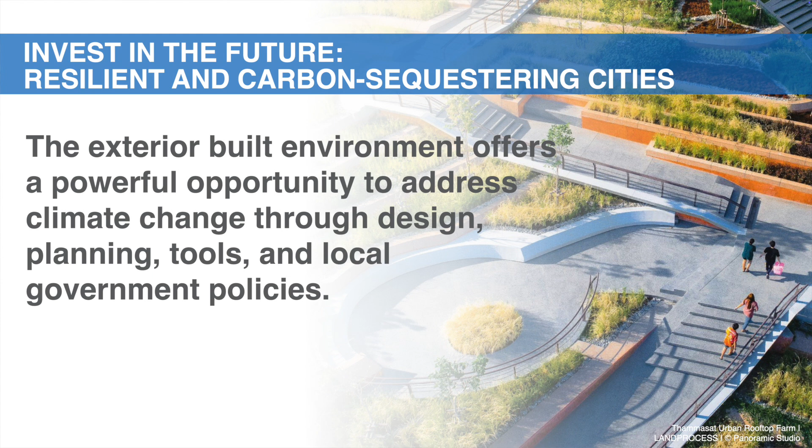So when we started our organization, the name Architecture is in there, the name 2030 is in there. As Andy mentioned, that was the date in which we wanted to see all new buildings be net zero, or we called them carbon neutral actually back then in 2006, which meant they were very efficient to operate and they were powered by renewables and had no fossil fuels on site. Well, that was a novel concept back then. Maybe we understood energy efficiency from the energy crisis in the 70s and then into the 80s. But renewable energy was just starting to take off, and we didn't even think about on-site fossil fuels that much.

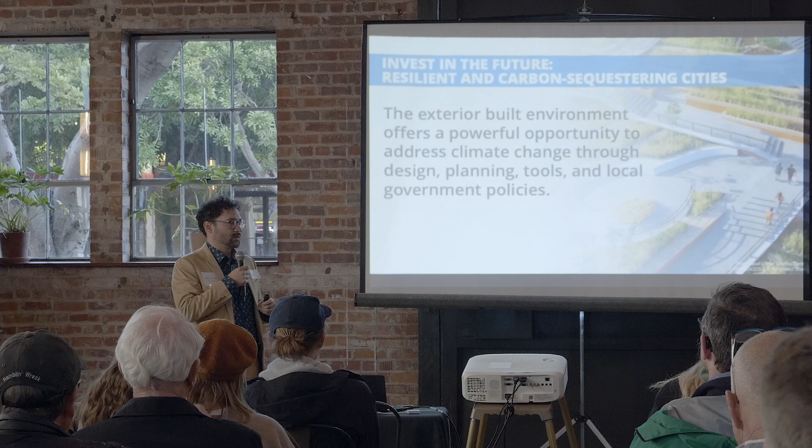However, every little building had a little power plant that was having emissions from its natural gas, and now we're talking about that. But at that time, gas was a bridge fuel for climate. We weren't talking about zero. We were talking about 80 by 50 maybe at most, 80% reduction by 2050.

But, and this was really fascinating, this is how we got started. We looked at data and we said, as we grew our built environment since the dawn of the Industrial Revolution, we increased our energy consumption, and with our energy consumption, we increased our emissions. And this was the trajectory. I could go further back if we had the data, but I'm showing 1995 to 2005 when we launched the 2030 Challenge. And this is what it looked like.

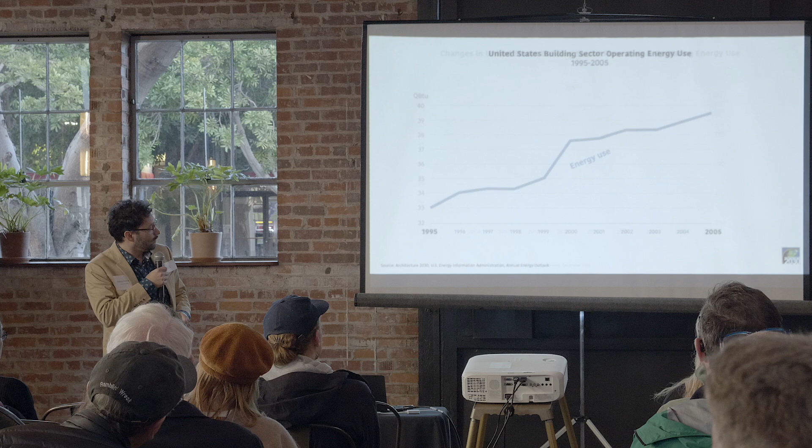Now I'm going to fast forward to 2005 to today, and this is how much building we keep adding to our building stock. We've added essentially 44 cities the size of Chicago to the US building stock. Increased our building stock by 70 billion square feet. That's a lot of buildings, right? And in a short period of time too, by the way. This is 19 years, about the same time that I started working at Architecture 2030, we built 44 Chicagos. Holy smoke. We're gonna talk a little bit about this growth pattern piece.

But look what happened. Starting in 2005, on a dime, instead of going straight through the roof, we started leveling things out and actually have reduced energy consumption in US building operations by 16%. It's because we're designing buildings to be more energy efficient. We're renovating buildings to be more energy efficient. This is both design and policy that allowed us to do this.

But how quickly did that change? How quickly? Because we woke up and we said this is a problem and we want to do something about it. And it didn't matter who was in the White House. This trajectory continued and moved forward under Republican and Democratic administrations. It didn't matter. It didn't change the flow.

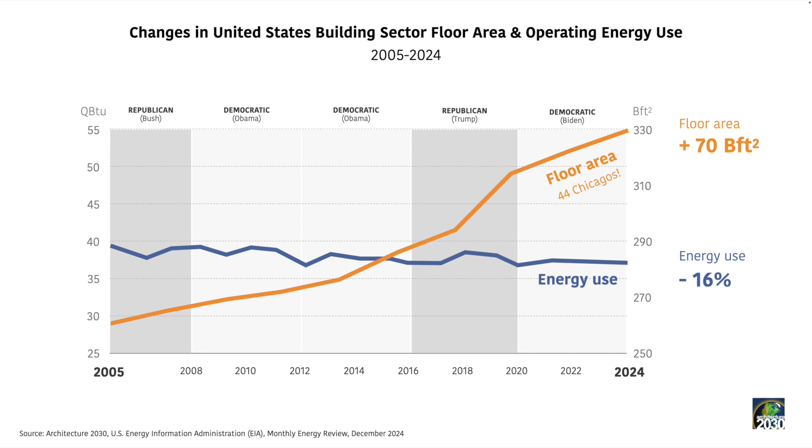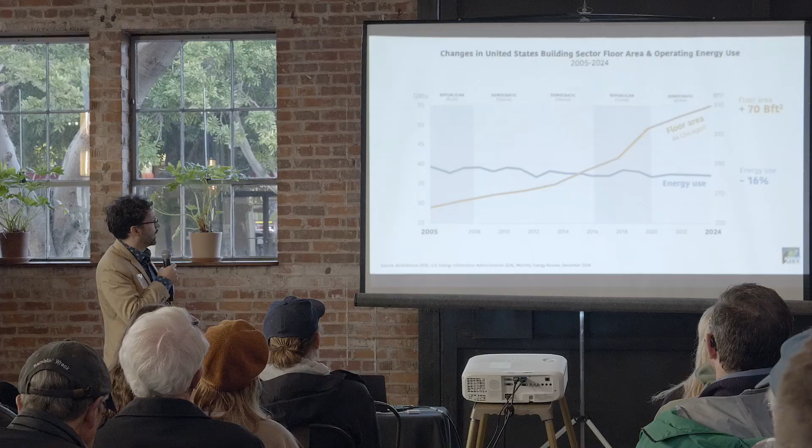And we see the movement of the modern movement as a great example of architecture, how we had the international style in the 1920s to the 1940s. We changed the face of the planet, the way the built environment was constructed, in a very short period of time. But what's even more exciting than that drop in energy consumption is the drop in emissions.

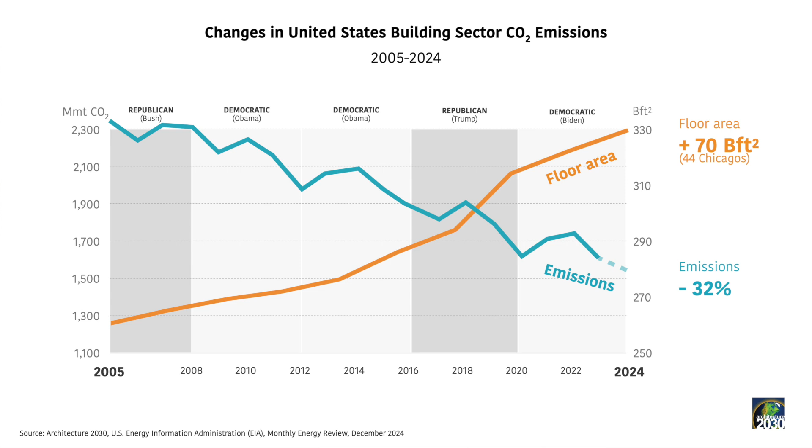32%. So when people say you get depressed, or we're not making progress - if you look at the numbers for US building sector operations, this is our heating, our lighting, our cooling, our plug loads, everything we use to keep the lights on - we've actually reduced emissions from 2005 levels by 32%, at the same time as building 44 Chicagos. That's tremendous, that's amazing, to decouple the growth of the built environment from operating emissions.

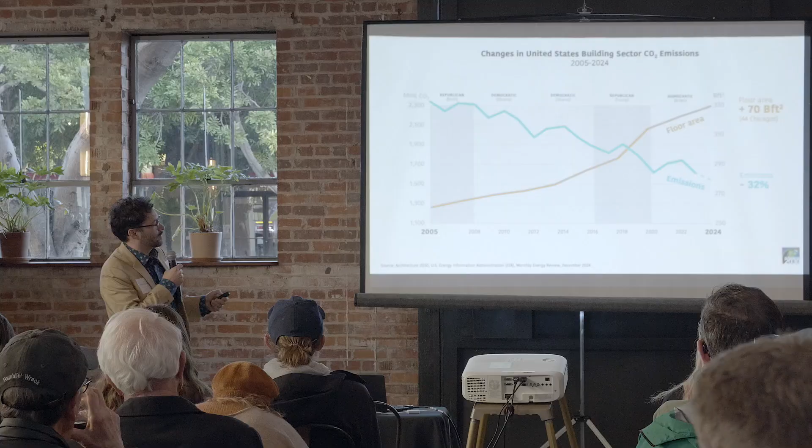But we're not talking about all the other pieces, and I'll get to those, because there's materials and there's the growth pattern and how much we're actually building. But in terms of operations, we've wanted to fix it. We're making progress. We're on track to the Paris Agreement for our sector.

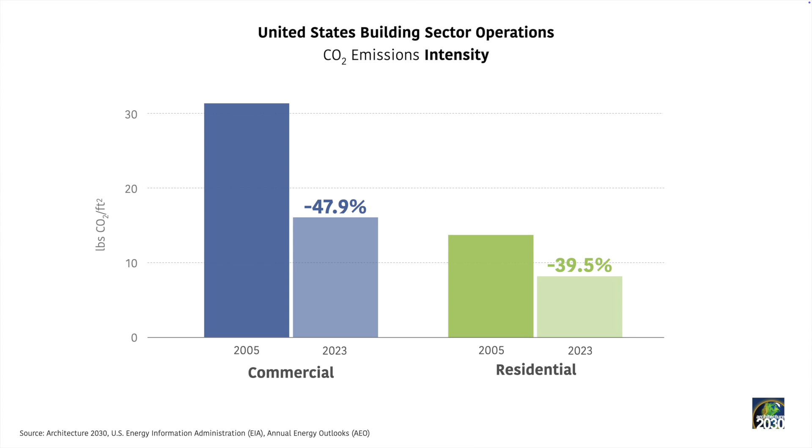And a big part of that is due to the fact, of course, that we are decarbonizing the electricity grid. This is 2010 to 2024 for the US, 32%. Mostly, look at all that coal - we've gotten rid of most of that coal, at 47%.

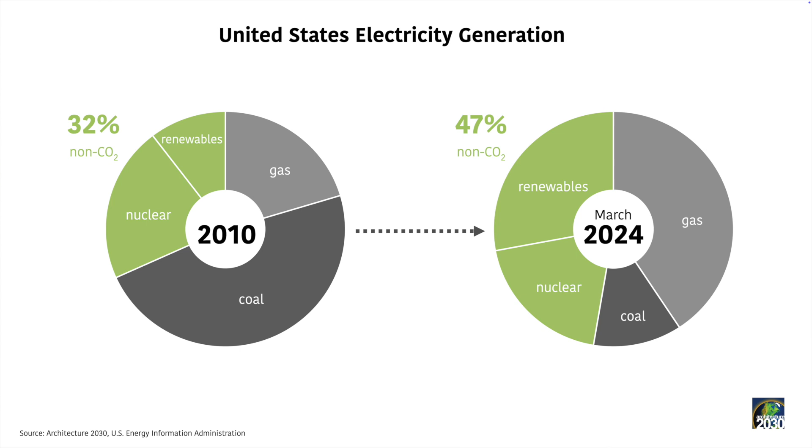But it's not just about the energy profile of the electricity grid. It's because we're doing great work in the design and construction field. And now globally, this is how it looks - 35% increase globally since 2010 in terms of our global footprint. That's the equivalent - I mentioned 44 Chicagos in the US, 2 United States globally.

Now we were the ones that coined the phrase that we build, or projected to build, the entire footprint of New York City every month for the next 40 years. It's the size of Paris every week. So plenty of work for you all if you're in the architecture and engineering fields, but a huge footprint impact.

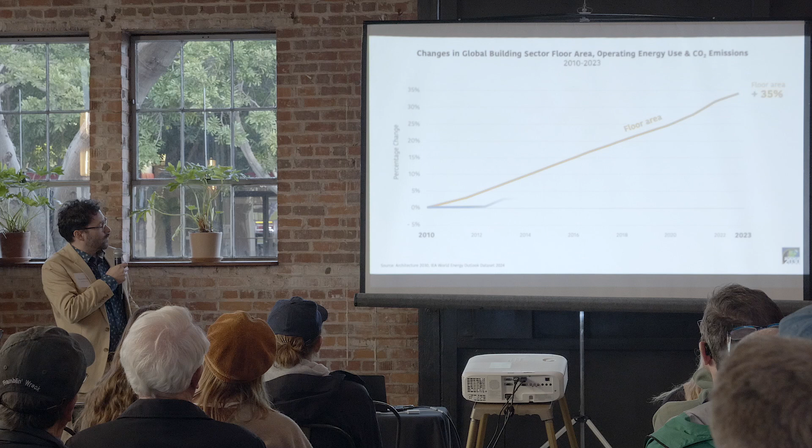And a lot of this is happening in Southeast Asia and Africa, which has an extremely young population. Latin America - we're still building in North America, and we'll still build a bit more, but it's happening in these other regions. And what's interesting to see, the globe is starting to follow a similar pattern to the US.

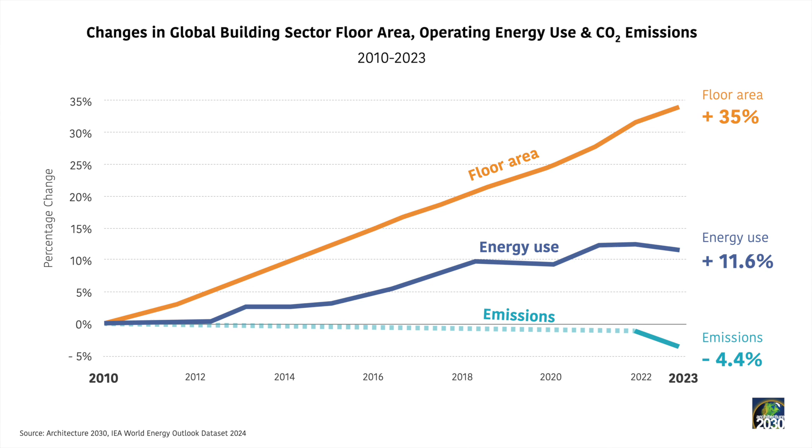And what we've done over the last 13 years is we're starting to level out energy use. We're not climbing as fast as we're climbing in our growth. We're getting more energy efficient, and this is emissions. We're actually down globally 4.4% - correct that if you're reading the recording - 4.4% of our CO2 emissions from building operations. So it's a huge success story.

We're starting to bend the curve down. We got to go faster, and we got to go there. But when we put our mind to something, we can do it. Again, a big part of this is due to the electricity grid globally.

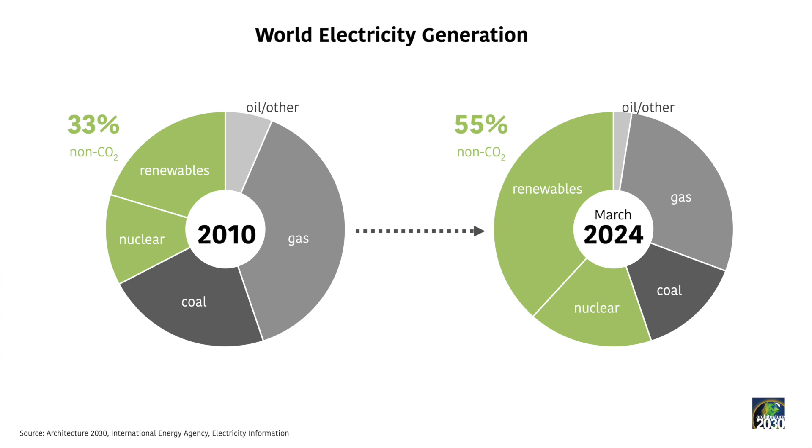Look at that - 33% non-CO2, now we're at 55%, and that's because solar and wind are just taking off like crazy. We've had more solar investments every year than all other energy sources combined for at least 5 years. We hit the transition mark a while back, that all the new generation was renewable. So we're on a good track.

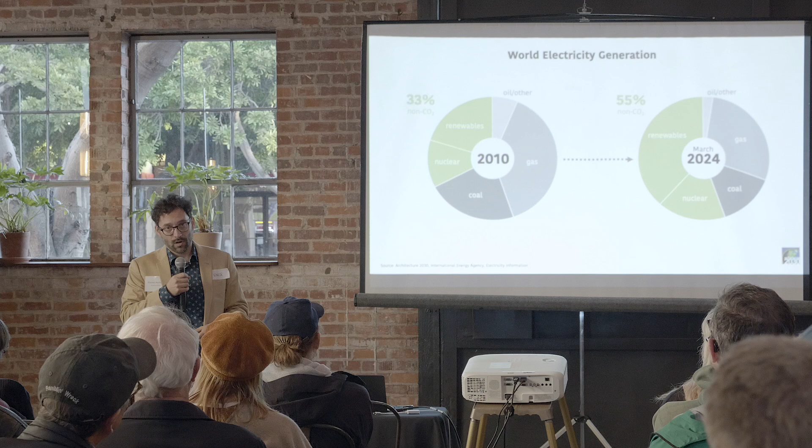So we're still responsible though for 27% in buildings of annual operating emissions, and it's made up from a variety of just subsectors. But more importantly, what I want to talk to you today about is the materials.

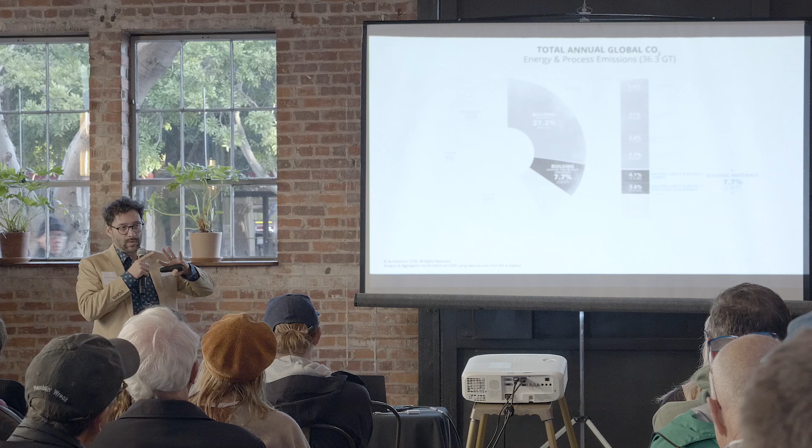So this is also called embodied carbon. It's the extraction, the manufacturing, and the construction of built projects - so we're talking about buildings here. It's about 7.7% - this is just the high intensity materials, essentially four materials: steel, aluminum, and concrete. It's three - they kind of do steel and aluminum separately.

But in addition to buildings, those high impact materials go into infrastructure. We don't really think about that a lot. I mean, a lot of the policies are devoted to buildings. We have a lot of great design going on - we have design thinking, structural optimization, low carbon concrete, mass timber designs, things like that. How are we affecting infrastructure?

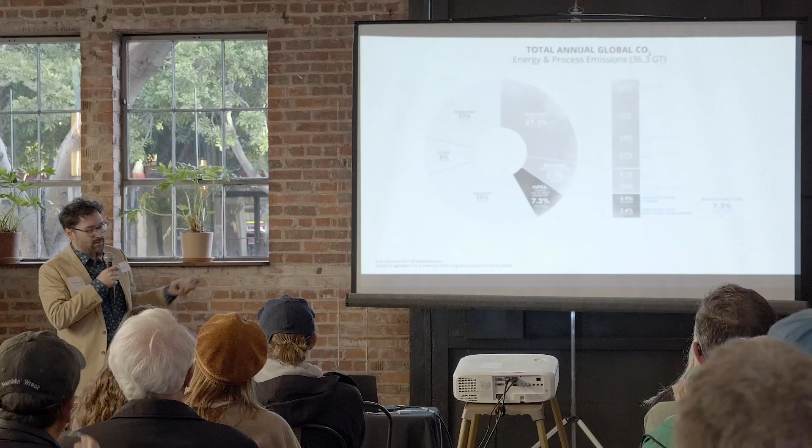And when we talk about the growth of infrastructure, which I'll get to, it's even more dramatic than in New York City every month for 40 years. So when we think about this, let's break this down a little bit.

This 15% that goes into materials, where do they go? This is, on the far left, cement. Half of the cement goes to buildings, half of the cement goes to infrastructure. That's fascinating - we think about it, it's under our feet right now. We're in a building, but it's under our feet outside too.

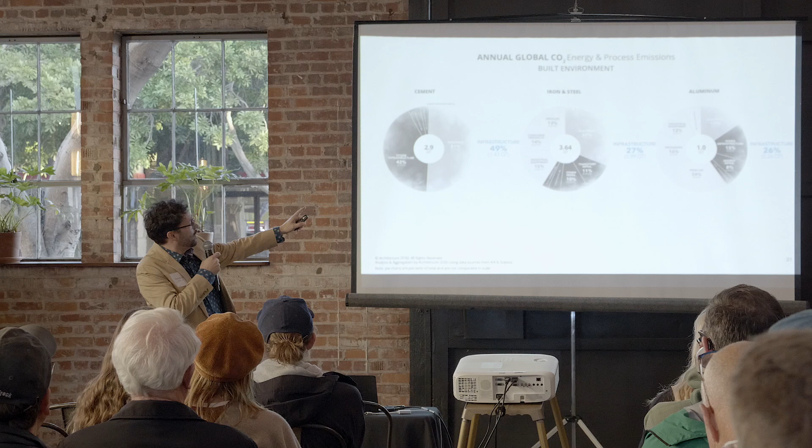Iron and steel - it's about a quarter going to each one. And then aluminum, about the same - we actually use more aluminum in our infrastructure. I won't go into the whole tariff piece conversations about these, but it's affecting our infrastructure significantly.

And that's just the high impact materials that we know about, that we have data because they're so large, so all consuming that we can actually understand what they are. We know asphalt, for example, is a huge infrastructure material, and we have zero data for it. We have very little information about how much asphalt we use, what its energy consumption is, what its emission profiles are across the globe. We just don't have that aggregated data.

So we know a good portion of this other industry, this other 22%, is industrial products that go into our infrastructure. Could be piping and roadways, all sorts of things.

This is the staggering statistic. I told you it's the equivalent of New York City every month for 40 years in terms of buildings. But the UN Secretary General says that the infrastructure needs of our population of the globe in the year 2050, 75% has yet to be built.

I think about that as we're going to do four times the infrastructure that we have right now. And where is this happening? Well, it's mostly happening in developing countries, where they don't have the infrastructure that they need to support the growing populations. Some of it, of course, will happen here still, and a lot of this will be torn down or rebuilt. There's a variety of different ways, but four times in a short period of time, it's just mind-boggling.

So we know that even if we get a handle on operating emissions, which I think we will, we're going to burn up our carbon budget like that, with all of this material that goes into our infrastructure and our buildings. So how do we get a handle on this?

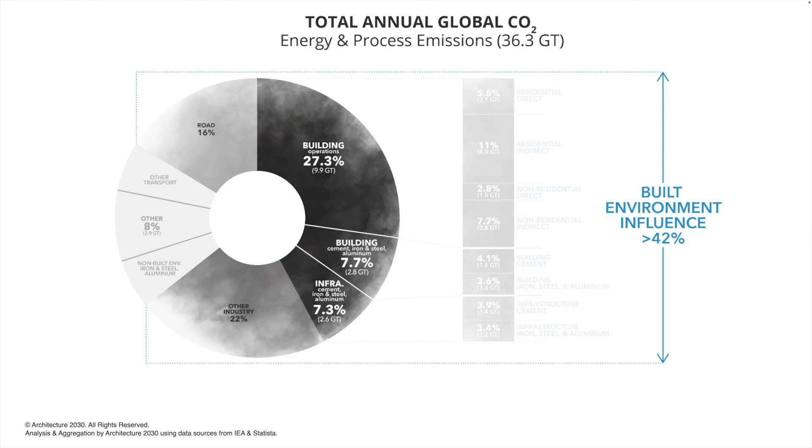Certainly more than 40%, which we started talking about 10, 20 years ago, but a huge portion, almost nothing is not touched by the built environment. It's amazing to see the reach and influence. So we should really be talking not just about buildings and a focus on that, but the broader built environment.

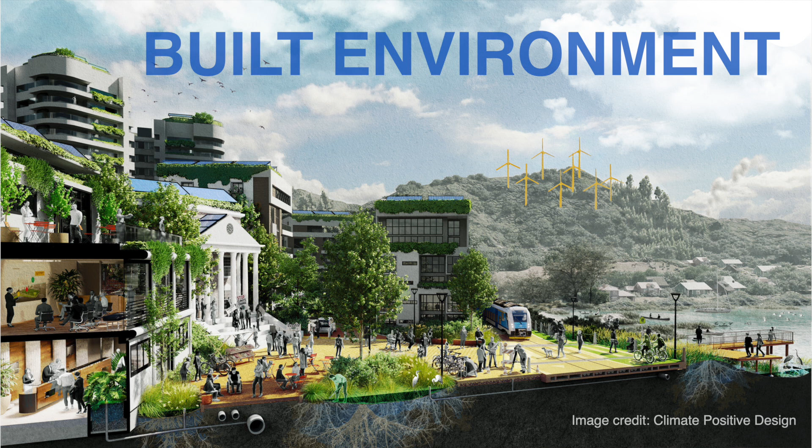And I know I get the question about Architecture 2030 all the time. Yes, we have architecture in our name. I feel like we should change it to Built Environment 2030 if we're going to change our name. I know 2030 is coming up and we'll deal with that too. But Built Environment is where it's at.

And this is interdisciplinary. This still leads with design. We've got infrastructure engineers, we have urban planning, we have landscape architecture, civil engineering. We have all sorts of amazing design disciplines that if we put our minds to this, we can change. But we also have incredible opportunity in the built environment and levers of change that we didn't have in buildings the way we do in infrastructure.

So we know, I brought this up earlier, that 30% of global emissions are from urban sprawl. And I'll get into some more details about this in my presentation, but it's a lot of infrastructure to go build out entirely new neighborhoods, all new underground utility systems, all new roadways, all new infrastructure above ground for electricity.

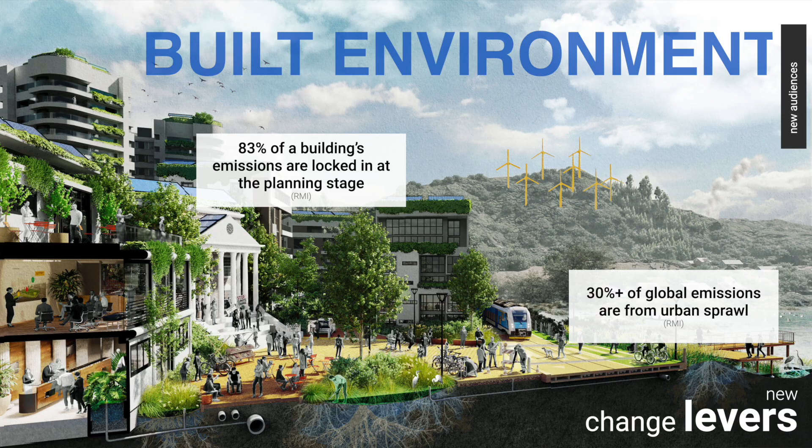We also know that buildings are not always designed by architects, but are also designed by planners. They set up the massing, they set up the setbacks. 83% of the emissions are locked in the planning stage. Orientation—this is phenomenal about how planners can actually affect building design, and we don't think about that and how we leverage it.

I mentioned the fact of four times the infrastructure to be built over the next 25 years. And that we know where those emissions are coming from. They're coming from the materials. I showed you that in the concrete and steel and aluminum. And we have the data to back it up.

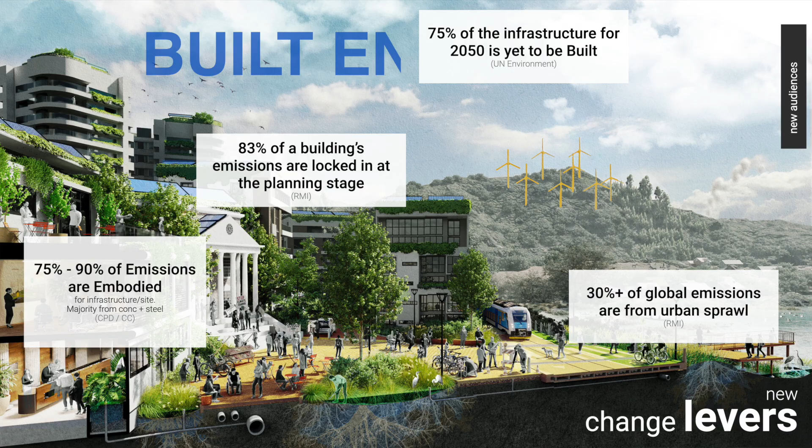We have thousands of infrastructure types of projects. We see that all the emissions are happening—about 75 to 90% of the emissions are coming from the materials. But yet, the natural environment and nature-based solutions that I'm talking about have an incredible opportunity for drawdown effect as well. We're talking about vegetative soils, being able to draw down and pull CO2 out of the atmosphere. About 30% of the drawdown needs by 2030 could be met with these ecosystem sequestration services.

We also know that we're making tremendous amounts of investment into infrastructure. Of course, we're going to build all that. I mentioned that, but the numbers are staggering. It's about $90 trillion in major infrastructure projects between now and 2030. That's 5 years, and it's $90 trillion. That's the World Wildlife Fund stat.

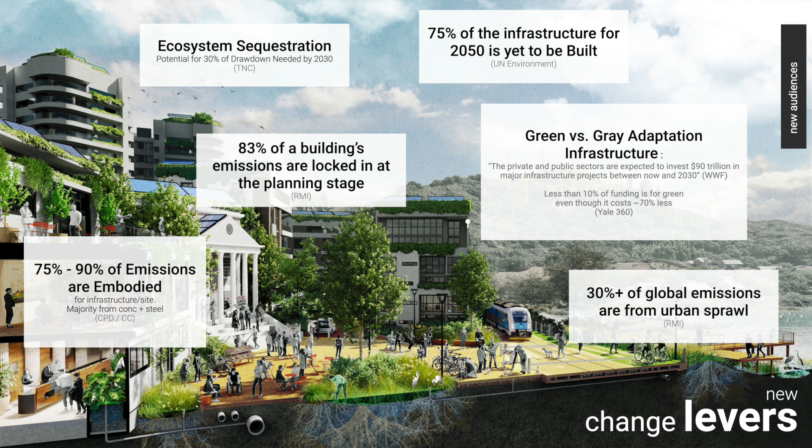And we know that of the funding going into those projects, less than 10% is for green infrastructure projects, even though they cost about 70% less and perform similar functions. A big part of that is because we don't have quantifiable data on nature-based solutions and infrastructure. So municipalities and other jurisdictions are hesitant to engage with those because they end up getting value engineered out, since they don't have the data to prove they can meet the same things that hard infrastructure can do. But we also know that we have these co-benefits.

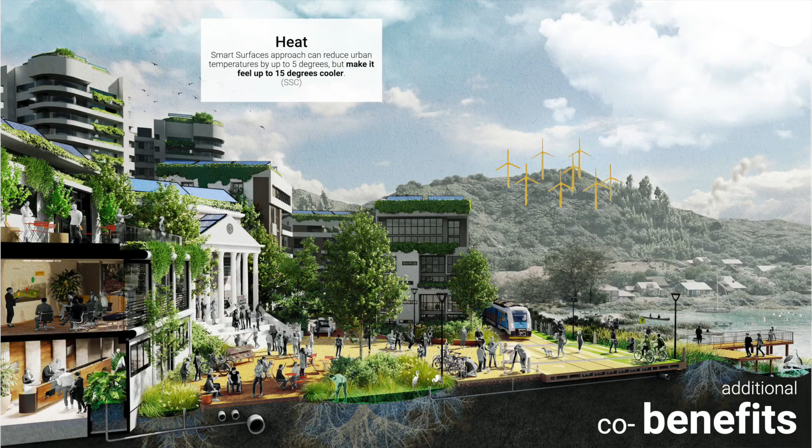We know that we have urban heat island effects that nature-based solutions in urban environments can protect against, reducing the amount of heat by, even if it's 5 degrees in temperature, can make it feel 15 degrees cooler. Just by planting trees, just by having these opportunities in our built environment.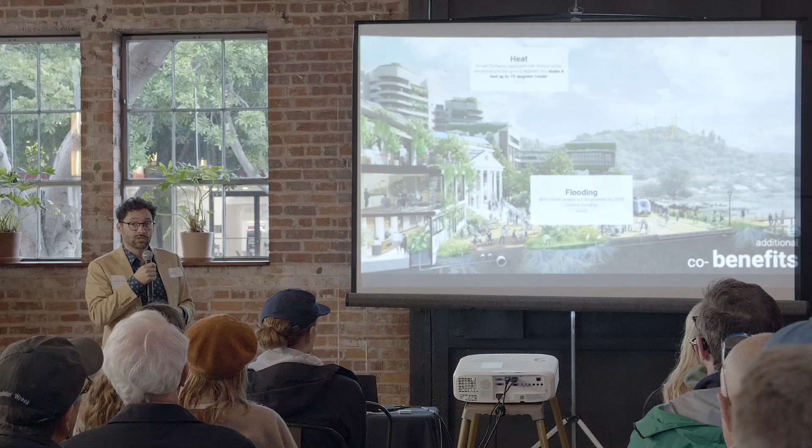We know that flooding is one of the major issues for resiliency across cities across the world. 800 million people will be affected by flooding, coastal flooding, by 2050. We have living levee opportunities with infrastructure, constructed wetlands that can help meet these needs with nature-based solutions that are less carbon intensive. We know that these support water use, which is a huge part of the energy-water nexus, and that they can support biodiversity.

As much as we talk about the climate crisis, we're in a biodiversity crisis as well. There are separate COPs in the UN environment programs around these different areas. These are part of the same conversation if we focus on nature-based solutions. And we know that more equitable communities are brought in with nature-based solutions, not just the heat aspect, but air quality as well, access to open space. These are really critical elements.

So Architecture 2030, over the last 2 years, has had funding from the Climate Works Foundation to support climate positive design of the exterior built environment, with a focus on landscapes and infrastructure. As part of that, we evaluated climate action plans from a variety of different sources and disciplines, and ones that are in place right now. Many folks are starting with their second wave or third wave of revising their climate action plans.

What we found is that there is a shift to move from more mitigation-focused strategies in many local municipalities into adaptation. We're at that point. I remember when Ed, our founder, was sitting next to Dr. James Hansen, and he said, when are we going to start seeing all of these impacts of climate change? And he said, when we reach 1.5. Well, we're pretty much there. 1.3, 1.5, we're here. And so we need to be thinking about both of these together.

And that's the amazing part about nature-based solutions, is they are both an adaptation strategy and a mitigation strategy. So we have to think about how our climate action plans address both. In fact, I'm going to be a reviewer on the American Society of Landscape Architects Biodiversity and Climate Action Plan, BCAPS. So we might even think bigger and bolder about what this means and what solutions meet.

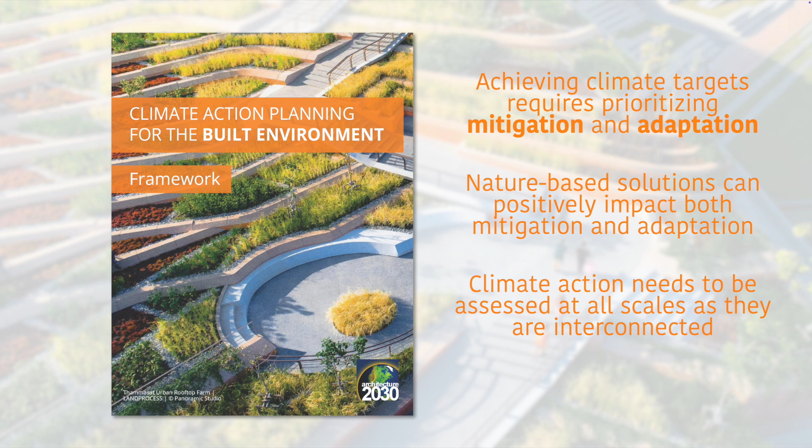We also know, again, nature-based solutions can meet that, and that we need to think of it across all scales. This is not about just buildings, putting a resilient building in an unresilient place. That's not going to work. We have to think at the urban and the regional scale.

We also spent over the last 2 years trying to understand the impact of urban planning decisions on embodied carbon emissions. So around how do we reduce the impact of that concrete and the steel that we're putting in? I mean, half the concrete, a quarter of the steel, a quarter of the aluminum. How do we reduce the amount that we need? How can we leverage design thinking? How can we affect planning to do this?

And we lead with a sufficiency mindset. Sufficiency, I'll talk about in a minute, is part of a three-legged stool from the IPCC and from the UN framework. We're familiar with efficiency—we have energy input, how do we get the most out of that in its output. We're familiar with renewables—how do we power that energy with renewable and non-carbon sources. Sufficiency is how do we reduce the demand for energy, land, and water, and other vital resources. How do we reduce the demand?

It changes our thinking. It raises the question of whether we should build at all. And we'll dive in a little bit to this. So we start there. When should we build? How much should we build? What's enough to meet the needs of the people that we're designing for?

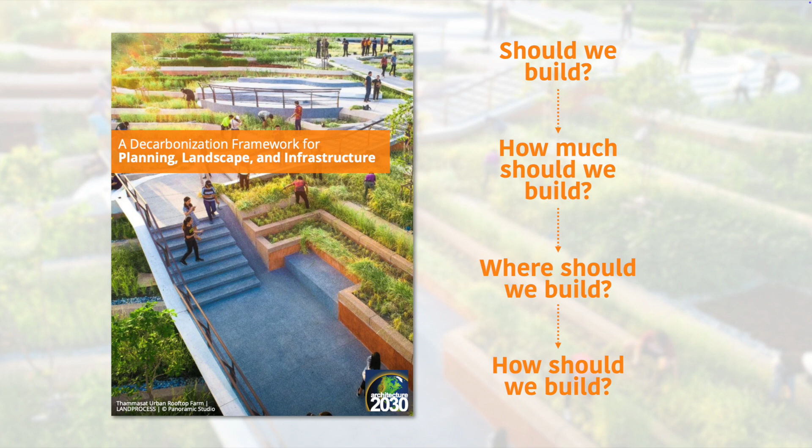Where should we build? It matters in terms of our natural environment that's already providing ecosystem services, already doing the carbon sequestration. Should we build on greenfield development? And then how should we build?

Honestly, we've been spending most of our time over the last 20 years thinking about how we should build, and we very rarely ask these questions above. So this is how the presentation is going to be structured here.

We have existing infrastructure right here in a building, but we also have existing infrastructure that we've invested in our communities. Rather than building a whole new development down the road, how do we leverage the utilities, the connective points, the transportation networks that we already have invested in?

I got asked to be part of a qualifying team for a building in Detroit, to help evaluate the architecture firm. My very first question was: is it a new building or are you going to renovate one? They said they were going to build new. It blew my mind—an organization that thought they were doing sustainably minded design in the city of Detroit, of all places, wasn't considering leveraging the existing assets that were there. We have to think about this.

But that's buildings—I'm also talking about infrastructure. This project, in that blurry background, is the largest development project in the entire EU. It's the Old Athens Airport, and the landscape architecture firm working on it is Sasaki.

They're reusing the entire tarmac—300,000 square feet of concrete from that tarmac are being used in the project for walls in the landscape design. It's amazing, this is what we should be doing. Why are we tearing it all up and putting it in a landfill? We should be repurposing it.

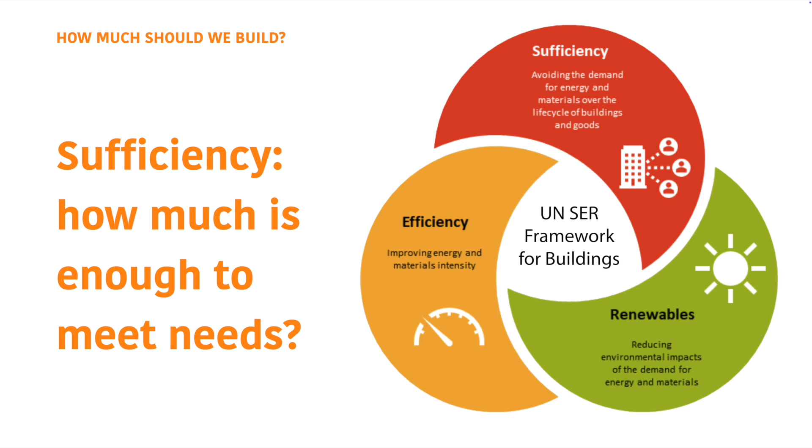At what point are we meeting the needs of our communities and the people within them, and how do we help elevate them? On a global stage, we're talking about how we meet the growing populations in the developing world—how do they get the fresh water they need, the shelter, the schools, the medical services they need? If we have a limited carbon budget, it should be used there.

At the same time, if we've already invested and already put up all those emissions from our existing infrastructure, how do we make sure we're not exceeding planetary boundaries while we bring the rest of the world up? So it's really important.

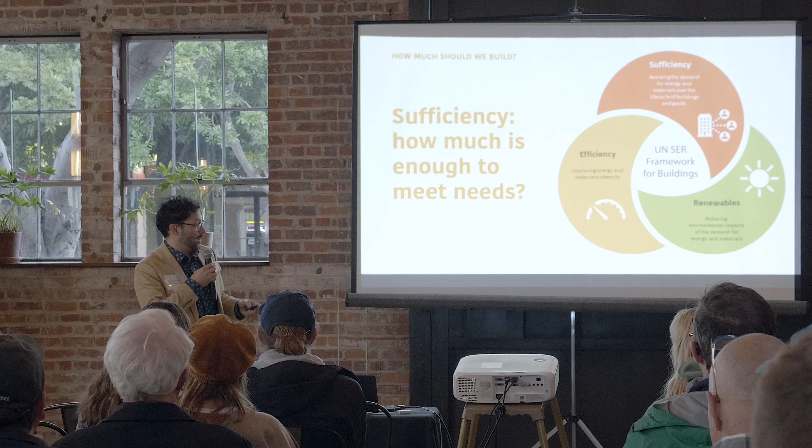I don't know if you're familiar with Kate Raworth's donut economics, out of the UK—it's a new economic theory, very similar to how do we meet the needs of folks without exceeding planetary boundaries. That's what sufficiency means: how much is enough.

We have to think about how do we leverage things for multiple purposes, how do we integrate buildings as infrastructure if we're going to do a building project. I was in San Francisco not that long ago—just next to Salesforce Tower, a real big monster of a building, is the new transit hub for the city of San Francisco.

All the buses and everything go in there. It's got an elevated roof, green walk pathway, and a little nature park associated with it that has businesses, including a little brewery.

How do we do more when we actually have to build? And how do you leverage new buildings? In Australia, they're leveraging a new building to take in all of the storm water and black water from neighboring surrounding buildings and sites and process it there.

Because they're already growing, rather than expanding the capacity of the infrastructure system, how do they think modularly and add it on through the next building piece? There's so many examples of this. Ontario particularly has a really great policy where it's a framework where they give allowances. Usually if you provided a public park or an amenity space, they'd give you additional floor area for the development. We could do that if they took on additional infrastructure pieces.

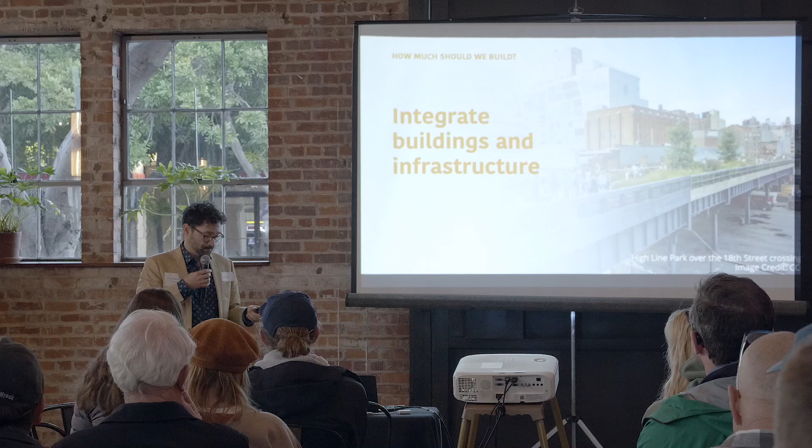So then I want to ask, now we say how much should we build? It's where should we build? Growth boundaries traditionally have been a planning tool to help reduce vehicle miles traveled, but it's also a tool to make sure we're not getting into greenfield development, all of the site work that has to be done and tearing up all of the vegetation that's there, acting for ecosystem services.

These are also making sure that we don't have the sprawl piece that I talked about earlier, adding all of that new infrastructure. So this should just be an added value to existing policies and platforms that we already have. And you're saving embodied carbon too. Great, let's do more of this.

We also need to make sure that when we do need to expand, that we know where we're going. I was at a World Economic Forum thing the other day, and they had the Minister of Tourism from Saudi Arabia talking about the Line - an entire brand new development built just for tourism along the coast, in a line, as one of the most amazing ways to do new development.

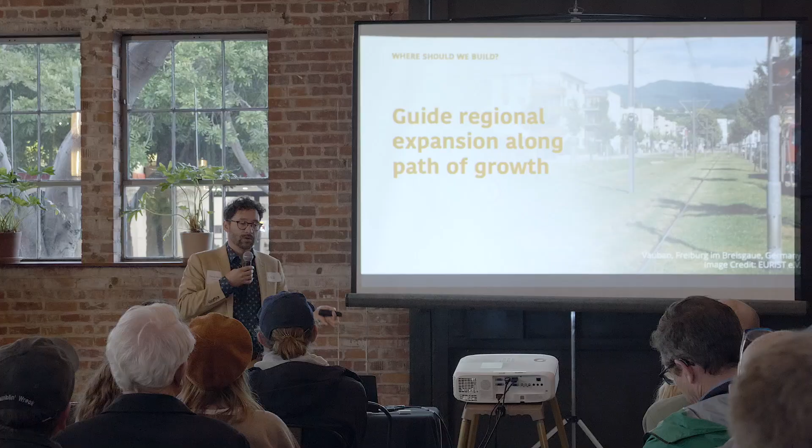It's not going from one place to another. It's not infill, it's brand new. We need to think about how we integrate and connect the pieces that we already have, in terms of our urban planning. I think we've done a pretty good job, but we could do better. We can make sure that we're going along those paths and we build on that infrastructure. And I'll talk about some of the synergies that we can find.

We need to support and prioritize transit-oriented developments. This is, again, not just a vehicle miles traveled reduction opportunity, but an opportunity to eliminate the need for new infrastructure if we build in these dense urban environments around transit hubs that connect us between each other. And those transit hubs can also provide all those other services, like the building in San Francisco with the public park.

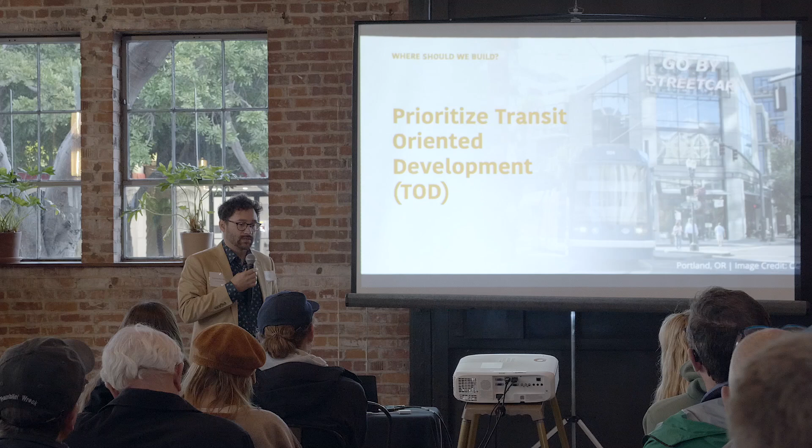We can incorporate all of these things as we build. Part of it, though - I live in Seattle, and we have a new light rail system that's expanded up north, and it's great, and I'm seeing great housing development along that, but you're not seeing the plan for complete neighborhoods. It's just housing right there by the light rail station. There's no amenity, no doctor's office, no grocery store, no coffee shop, no tap room. There is in Mountlake Terrace, not far from me, which I was really inspired by, but we're just not seeing this.

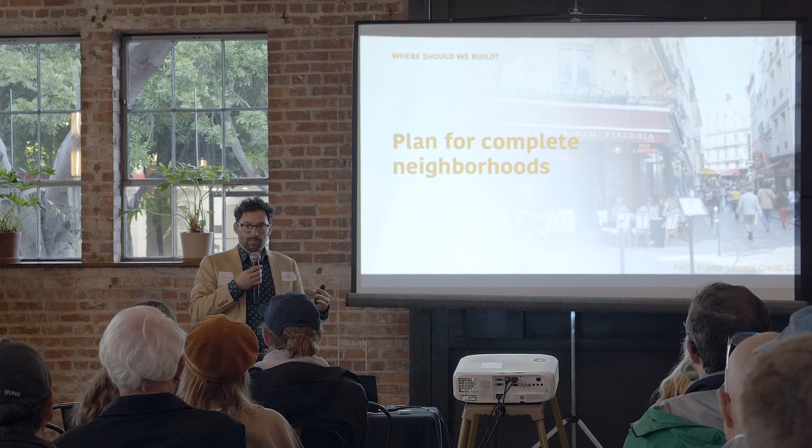These types of complete neighborhoods being developed around transit-oriented developments - we're trying to leverage that, and that's great. This is all part of the 15-minute city: can I walk or bike to everything that I need within 15 minutes? But we're not connecting the dots between the housing policies around these transit-oriented developments and the idea of complete neighborhoods. We just think people are just going to get on the light rail and then they'll go into the city, and we're missing the opportunity to build community.

We need to identify, protect, and enhance natural resources. I brought up greenfield development - these are things that are providing ecosystem services already for us. Every time we go through there, we're going to tear it up. We're going to have all this new equipment that's going to release emissions, and then you have to build all the infrastructure just to do what it was already doing for us, just to process all of our waste.

Wetlands are an incredibly valuable and important place for our ecosystems and for us as individuals, for clean air and clean water. And yet we try to replicate them with engineered services when we're tearing them down and replacing them.

We also have a great opportunity with urban and peri-urban agriculture and reducing food miles traveled. Where does our food come from? We're understanding all of the complexities of a global trading system. But if we can get more of our food locally - I know the farmers market is going on right behind us - there's great opportunity, not just in producing food, but also producing vital energy sources like power.

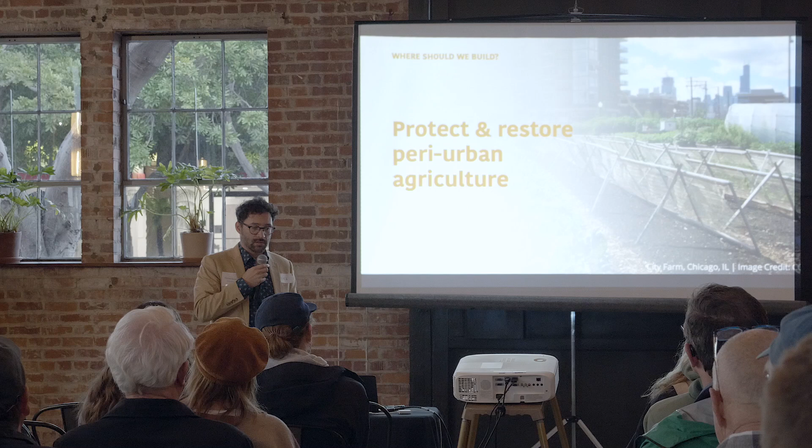There's agrophotovoltaics, where they're combining farming with photovoltaics to produce energy from the rural to the urban. We've heard about how farmers are keeping their farms by installing solar, and not just solar, but wind turbines. There's a lot of opportunity to leverage the agricultural sectors in and around our built environment, where we don't have to rebuild and start over. We don't have to build brand new power plants, as an example.

This is the opposite - we should not build on greenfield, but we should leverage brownfield sites. This can be challenging, I understand, but these are usually in places that are already directly connected to the urban built environments they're trying to serve. So when we're looking for land, rather than following a new path, there's stuff that already has the utilities sector. They're usually pretty big developments.

Obviously, there are remediation issues that need to happen, but we can use landscape architecture and remediation opportunities with vegetation to clean the soil and actually produce things better.

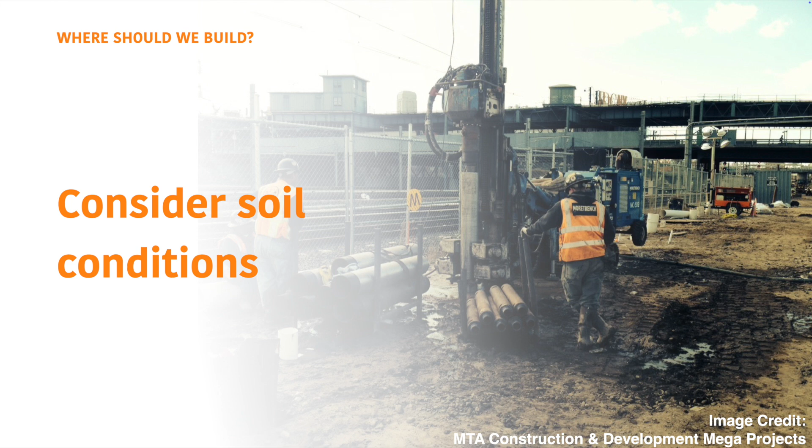We do have to be careful with this next piece, which is poor soil conditions. How often do we have to use carbon-intensive pier systems because we have poor soils or larger footings? And we just say, hey, that's where the site was, and that's where we can build. And honestly, that's where we put our affordable housing - we put them in the floodplain, we put them in the cheapest place we possibly can.

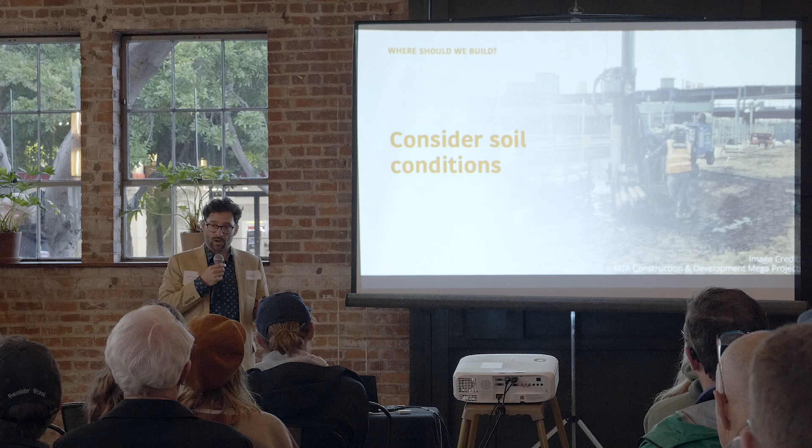We need to really consider where we build, and where we're building can have serious embodied carbon impacts. I'm going to talk a little bit about below-grade development, but we need to be careful, do an assessment, and see where there's opportunity. It doesn't mean we shouldn't be building in those places if there's a strong way to do it, but we should do a life cycle assessment to find out what it's really going to take in terms of its emission profile.

So now we looked at where should we build. Now we're going to talk about how we should build, and this is what we're more familiar with. But I want to leave you with this: leading with nature-based solutions is really, really key. We usually go to the last resort - we say we'll just put low-carbon concrete in and we'll be good, right? That's our solution set, almost like taking the building operations and saying we'll just throw solar at this thing and forget about energy efficiency. Where's the design thinking? Where's the opportunity for integration with our other disciplines?

If we leverage nature-based solutions, they're very resilient. They've been here for a long time, and we can help and enhance them. I think about constructed wetlands a lot, and living levees, because so much of the world is prone to rising sea levels. I think there's a tremendous opportunity for these living levees, which leverage the natural environment to help slow down and reduce sea level rise. We're starting to see those being applied in different places, but they can really do multiple purposes.

We also have to think of other resiliency opportunities. Living levees is a great one because of resilience to sea level rise. But in so many other cases, we're also affecting the built environment in preparation for other natural disasters. I brought up heating particularly. There's a really important interconnection between built environment, decarbonization, and urban heat island effect.

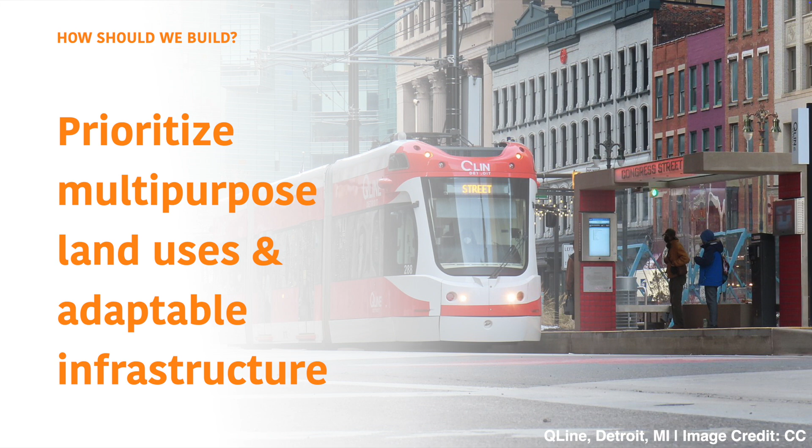We need to think about how do we get more out of what we put in. This is the QLine in Detroit. I don't know if you're familiar with that area - I brought up Detroit earlier. But they wanted to build this transportation hub to connect Midtown and downtown. And the Quicken Loans guy, I can't remember his name, he owns half of Detroit. He decided he'll pay for, basically subsidize, this transportation line. It's got all the things you want around it - bike lanes and bioswales, it's got all these things.

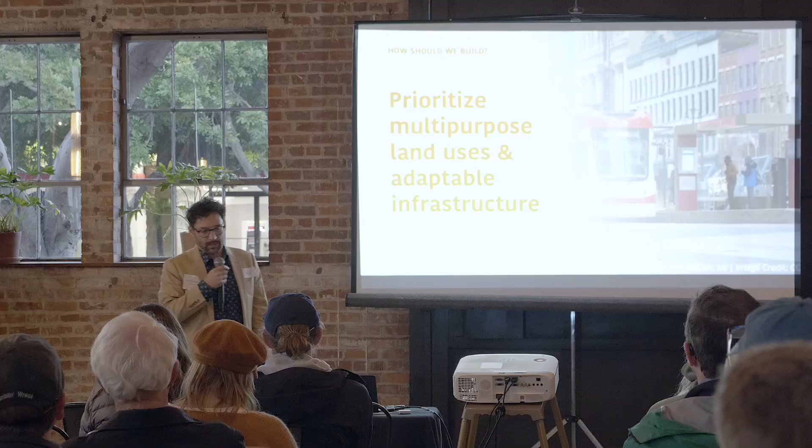But what they don't tell you is there's a fiber optic line underneath it - he owns the fiber optic line. That was the trade, and I think it's a pretty decent trade. But you're doing multiple things. If you're going to tear up that infrastructure already, do it all at the same time. Don't be piecemealing it, because then you have to come back and you're never going to tear it up again. So how do we leverage multi-purpose and adaptable infrastructure?

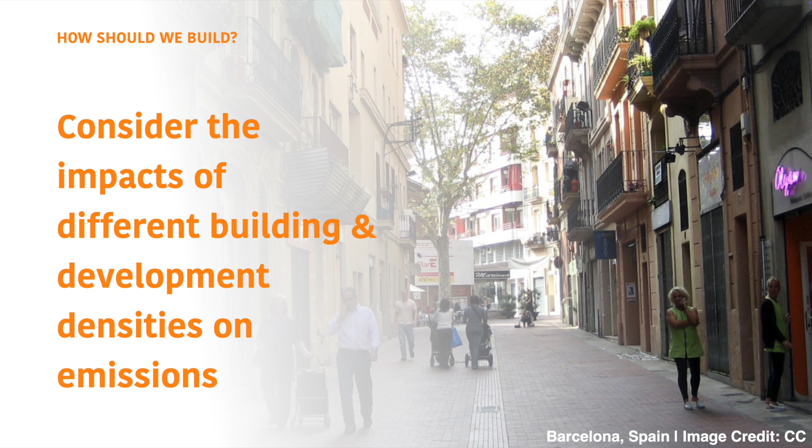This is a really interesting one about density. I'm curious how this will go in the Q&A conversations. Density is really interesting from an embodied carbon perspective - it's kind of like a Goldilocks thing. Too small of density, we spread out, like we have all that infrastructure issue I talked about for the amount of land use - new pipes and new roads and new electrical lines.

And then as we get really, really dense and we get to the megatall buildings that we see in Southeast Asia, everybody's in a race to the sky - those are actually pretty efficient in terms of material components per occupant. But they end up using really high embodied carbon types of materials like concrete and steel just to go higher and higher, and the base can't support it. So you've kind of got these two options.

So we have this Goldilocks thing - there's a sweet spot in the middle, and depending on whose report you read, it's somewhere between 6 stories, no, it can go all the way to 30 stories. It depends on which firm is doing the study. But there's something in the middle, and that middle is also more livable, which we recognize - people that live in the giant towers don't meet their neighbor, they don't know anybody. You also have to get all the way down, so there's resiliency aspects of that and danger. So there's a sweet spot here when we think about density from an embodied carbon perspective.

Related to this, something I didn't bring up earlier in the complete neighborhoods piece, is the importance of mixed use development. We can't have these office parks and residential pieces separated - that connects to the emissions issue from transportation. But we also need mixed income, not just mixed use. Too often I see affordable housing policies where developers can pay into a fund instead of building affordable units, and that creates isolation. We separate the folks that don't have it, and they end up building in the floodplain or in the TOD without the services - they have to have a transit pass just to go to the doctor. We're not connecting the dots here.

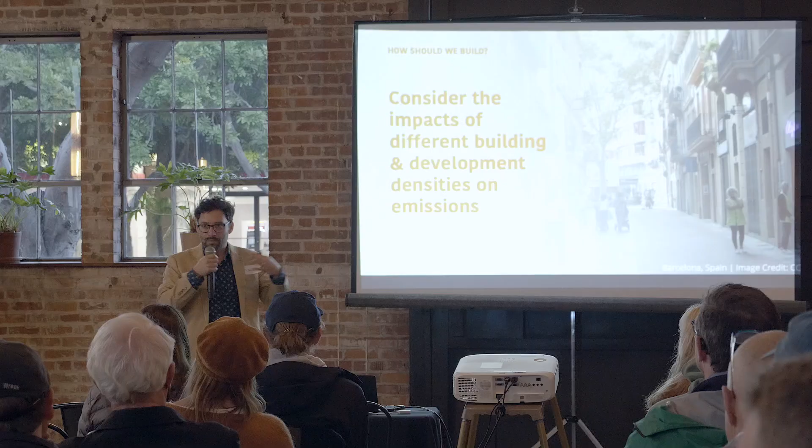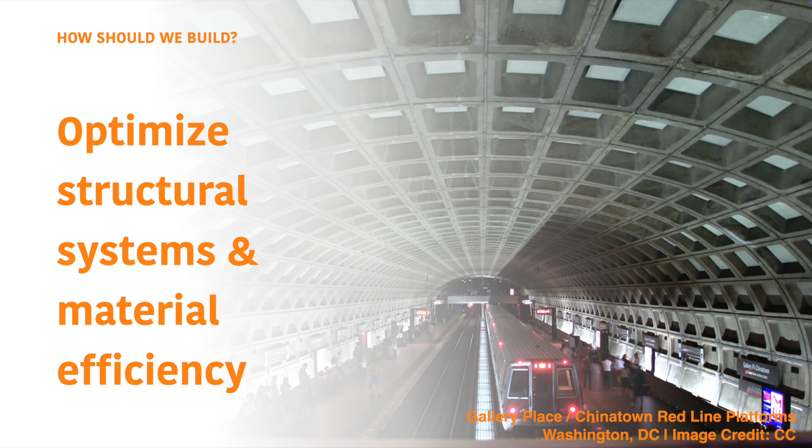When we think about infrastructure, we're going to need these heavy, big pieces of horizontal infrastructure. Transportation is a great example - tunnels, bridges, railways. We're not going to avoid these things, and they're going to use high amounts of concrete and steel. I'm not a Pollyanna - I'm actually a structural engineer by training, so I know this stuff. It's pretty cool and it got me excited about it, but we've got to mitigate its impact.

This is part of the iceberg idea - when we do a whole life cycle evaluation on a building, below grade is a huge carbon sink. We've got the digging, the shoring, we have to line it with high impact concrete. It can be, on average, 50% up to 80% of the impact of the entire building structure and substructure underground. It doesn't help that we have policies mandating minimum parking, and people don't want it for urbanism, for good reason, around the edge of the building or on the bottom floor, so we dig and tunnel down. We also have basements in residential pieces that are sometimes mandated, because we feel like we need to store our stuff in there.

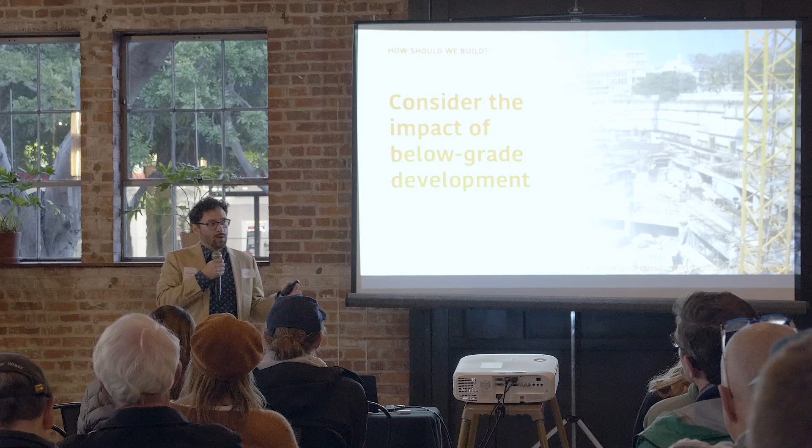How do we think differently about these design parameters - maybe we can avoid minimum parking, or be careful about how much underground development we have, and careful with the cut and fill. We're starting to see more policies moving from parking minimums to parking maximums, and this is a strategy that requires integration with urban planning and transportation decisions. You can't just force everybody out of their cars without providing any infrastructure about where they're going to go. We have to think about these holistically.

There are also opportunities to leverage our material choices - when we have to use them, what do we think? There's the Athens airport example, where they tear up the tarmac and use that in the building and landscape project - an awesome project, I can't talk about that thing enough. There's another great one happening in the Bay Area that's very similar, called Depave Park. We've got to use what we have on site, and we can find salvaged materials either on site, locally, or nearby. There can be challenges with structural reuse of existing materials.

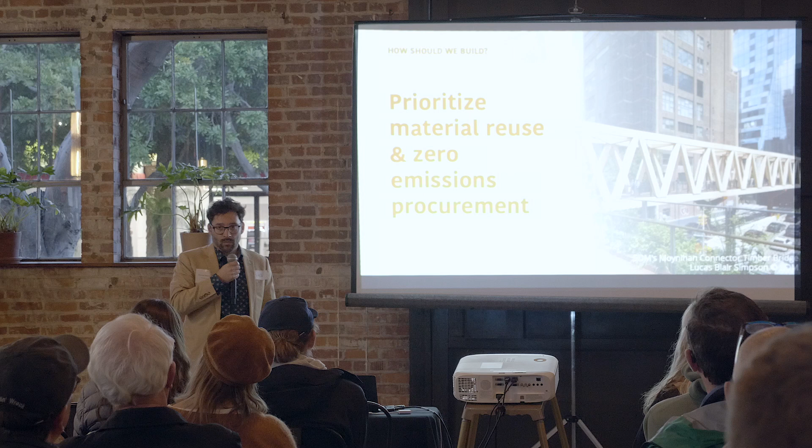We also have to think about how we leverage biomaterials. This is a footbridge connecting an area in the High Line in New York, designed by SOM, using mass timber elements that can withstand the weather implications of the New York climate. We can think differently and start leveraging different building typologies. We used to build bridges out of wood - the Brooklyn Bridge had a decking made out of wood.

And in fact, even the pier systems of the Brooklyn Bridge were made out of wood.

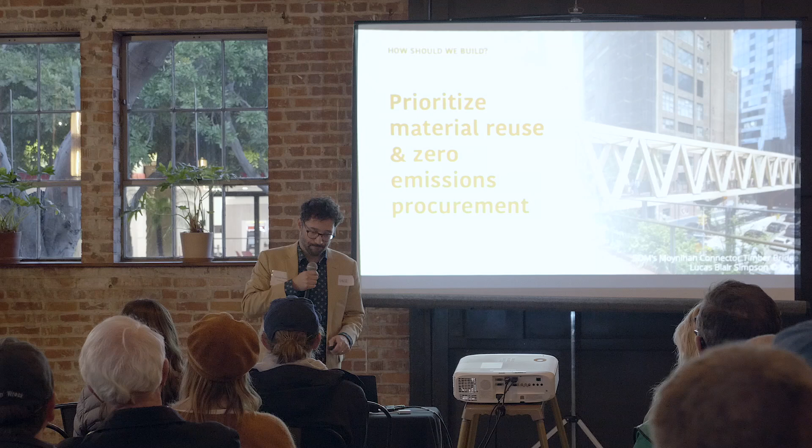Okay, one of my closing elements is that we are now in a technological revolution. Big rigs have gone electric, and all the construction equipment coming out of Volvo and others is electric now.

Pretty high intensity stuff. In mining, they're using these all the time because they go down into the pits to pull things out. They have regenerative braking on the way down, power up all the energy they need in the battery, fill it up, and drive all the way out. Then they're depleted, drive down, and redo the regenerative braking.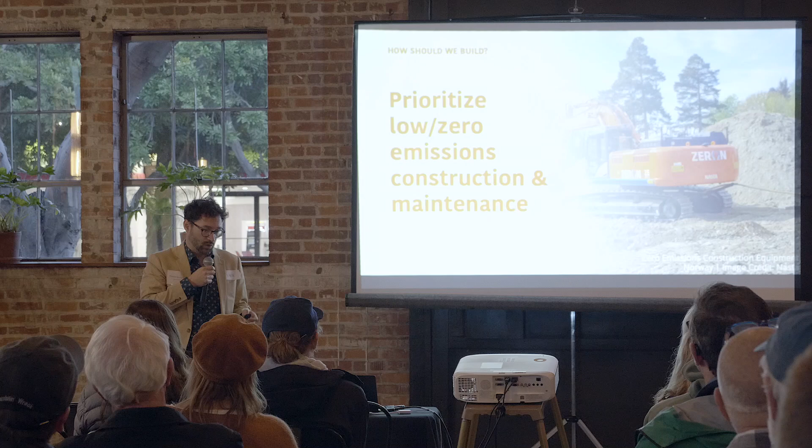So in closing, I'll show you a few resources besides the framework I pulled these from. Architecture 2030 has been compiling pockets of the future that are alive and thriving in the present. Where are the projects we want to see replicated, and what elements have they already implemented? When we have a really complex problem, we pick ideas that are lying on the ground to solve them because they're so immediate and so fast.

We need to know exactly what we want. We got the world we envisioned back in the 1920s with the international style, and that's why every building looks the same regardless of climate zone. They presented at the 1936 World's Fair in New York - I might get the date wrong, but pretty close - the city of the future. It looks like Dubai, and that's what we got. We designed that. We knew what we wanted.

We don't have a design vision for the future well enough. This is an attempt to do that. We're visual people in the design community; we want to see what this looks like.

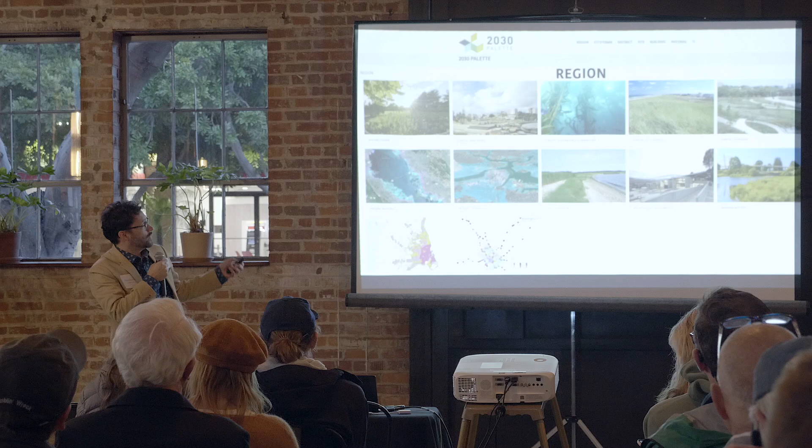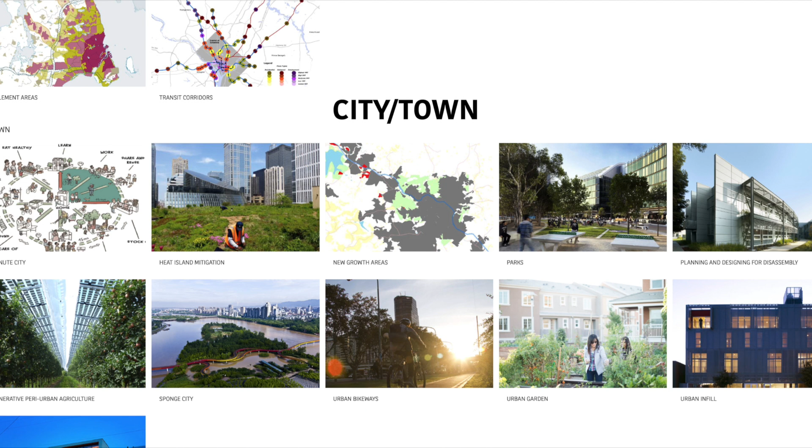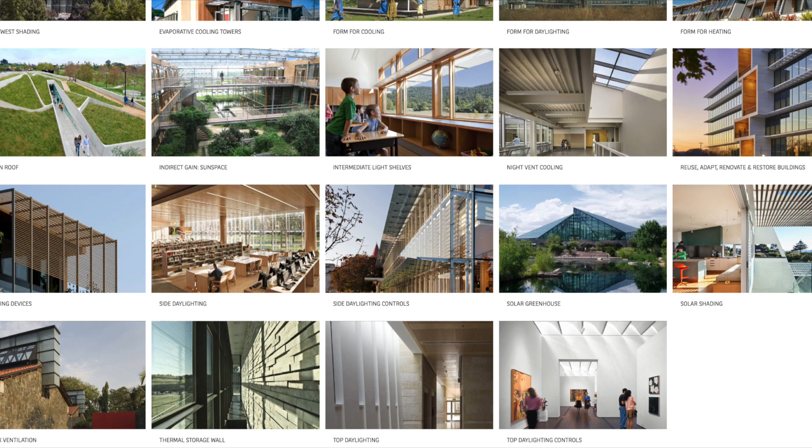So we looked at things not just at the building level, but all the way at the region and planning level. We did a lot of inundation mapping and hazard mapping, looked at transit-oriented developments, smart 15-minute cities, site infrastructure, vegetative cooling, and all the building strategies you're probably familiar with - passive cooling, daylighting, and natural ventilation.

But I pulled up just this plan - regional, district, and site strategies. There's 35 of them, with great examples of who's been doing this around the world, what policies they implemented, how successful they are, and what the rules of thumb are.

You don't need to do all the research. We've got AI tools now that'll crunch all the reports - like, what are the top 5 things we should be doing here? What should be incorporated into your BCAP, your Biodiversity and Climate Action Plan? We know what they are, we know the strategies. Let's just get to work.

I want to leave you with something a colleague of mine wrote in a report. He was doing a systems thinking workshop. I've been thinking about systems change for a long time, but I couldn't really articulate what I was trying to think about and how to share that with folks.

He had this, so I'll read it because I think it's so well written. He said this is really important for me as an NGO, because NGOs are mission-based - we can collaborate, and we don't. The unspoken reality of mission-driven organizations working in the same space, like sustainable built environment, is that most of them have neglected to intentionally design the interconnections with one another, the roles and relationships that will produce an order of magnitude change and impact.

Instead, we find duplication, ignorance, ambivalence, role confusion, and even direct competition between organizations is more common than well-designed systematic collaboration. So it's the difference between cutting down a bunch of trees and strapping them together to get a rudimentary raft, or designing a really amazing vessel that we can all share and participate in together.

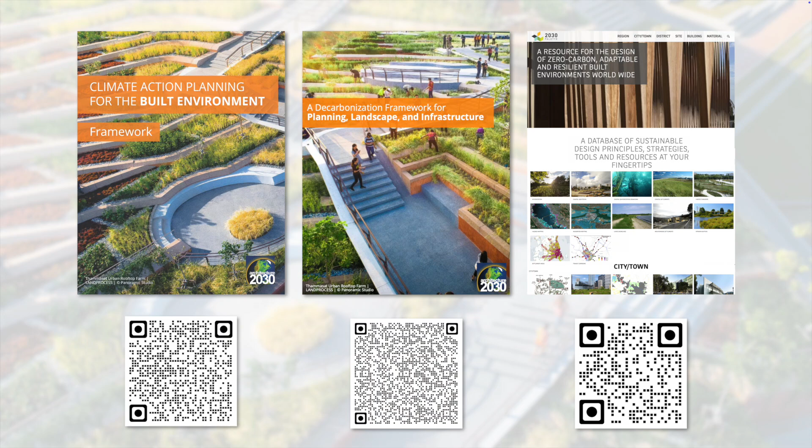But here's some of the resources, and I think they're going to share them in the presentation material. I'm really looking forward to the discussion, which is why I walked through that as quickly as I could. Okay, awesome, thank you.

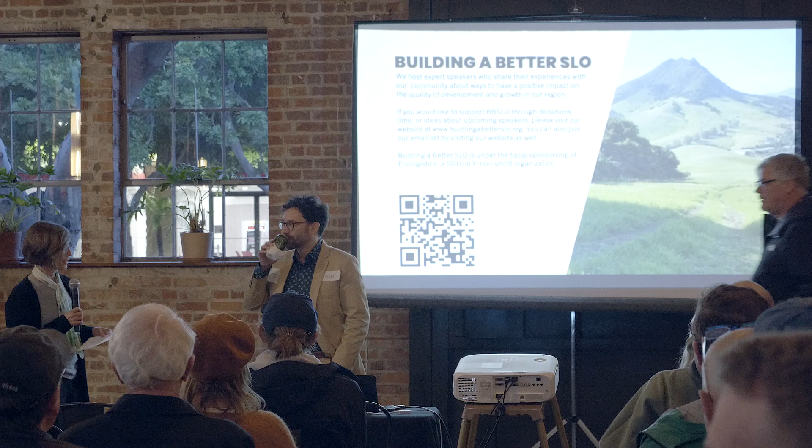Thanks, Bill. There's so many takeaways, and I can't wait to look at the resources, but one that popped out pretty quickly is the agriculture piece, because we're an agriculture-rich community—crops, regular, but also the wine industry, increasingly citrus, etc. I remember thinking about the struggles of farmers, and is there a market for selling carbon sequestration credits, or the PV wind farm example. Any suggestions on proposals that might fit a scale where you have a whole bunch of different farmers, but here's the kind of thing we could do to have better carbon, healthy soils, natural solutions, and have it be affordable to a farming community that struggles?

That's a great question. I don't have a lot of expertise in this, but I'll give it my best shot and share an example of something I think is pretty interesting. I think the connective piece is the real challenge—you have different lobbying industries trying to make carbon credits work, and they're not always the same. They look at durability, and what's going to happen without additionality—is it going to happen without my funding? Is it going to be there? Can I count on it? Am I just throwing money out the window, like when I book a flight and click 'I'll take the green option'—what are they even doing with that?